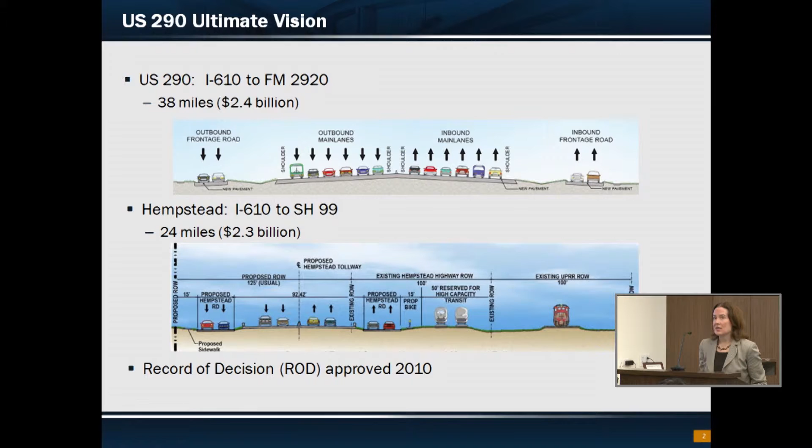From the costs shown on the presentation slide, you can see that the total is approximately $4.7 billion for the program. Neither agency had the funding or the resources to implement at that time, so they decided to pool the resources and work together. And what resulted in that was, in spring of 2012, a memorandum of understanding for an interim implementation on US 290, which consisted of a 2 to 3 lane reversible facility down the center, plus one additional general purpose lane from I-610 to State Highway 99. I should point out, as part of this MOU, projects on US 290 were expedited by up to 20 years ahead of their original implementation schedule.

In fall of 2012, public meetings were held on this proposed interim implementation on US 290. In 2013 and 2014, agency resources and responsibilities were reallocated between the two agencies, and as a result, the funding for US 290 was reduced. Therefore, a revised plan for US 290 had to be put in place. And what this plan consisted of was one additional general purpose lane in each direction from I-610 to State Highway 99. And I should mention that this is above the previously interim configuration, along with maintaining the one-lane reversible facility down the center. Public meetings on this concept were held in September of 2015.

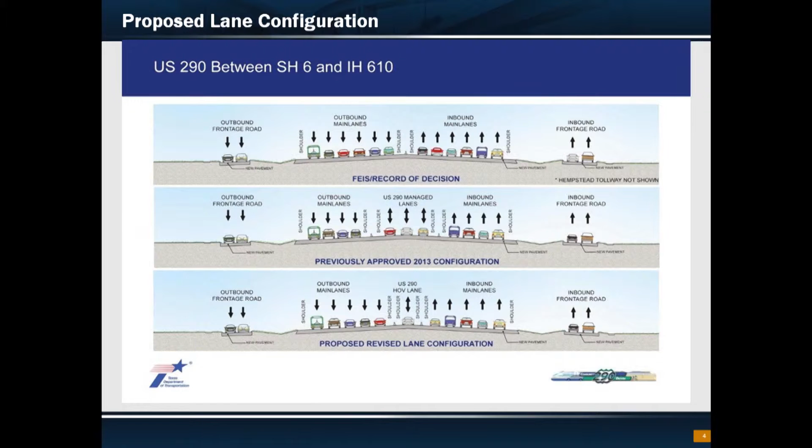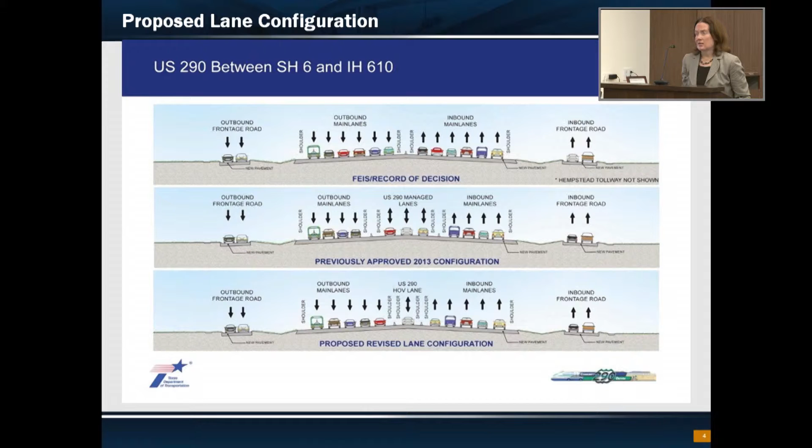Looking at specifically what this configuration involves, I want to start with the eastern portion of the corridor between State Highway 6 and I-610. On this graphic, the top shows the ultimate vision of the corridor. Like I mentioned, this has not changed. The second graphic shows what was previously approved, and the bottom section shows the proposed revised lane configuration. Again, the additional main lane capacity while maintaining the US 290 HOV down the middle. I should note that the HOV, as proposed, would have shoulders such that vehicles on the HOV lane could pass a stalled vehicle. This is different than how it operates today. What is operating today is in an interim condition during construction.

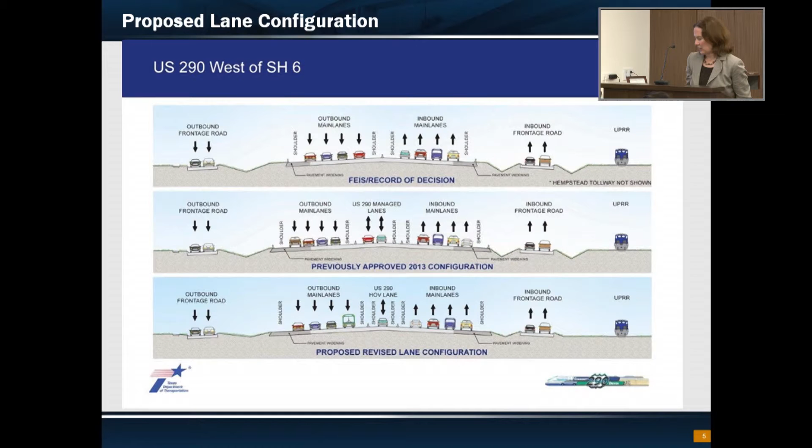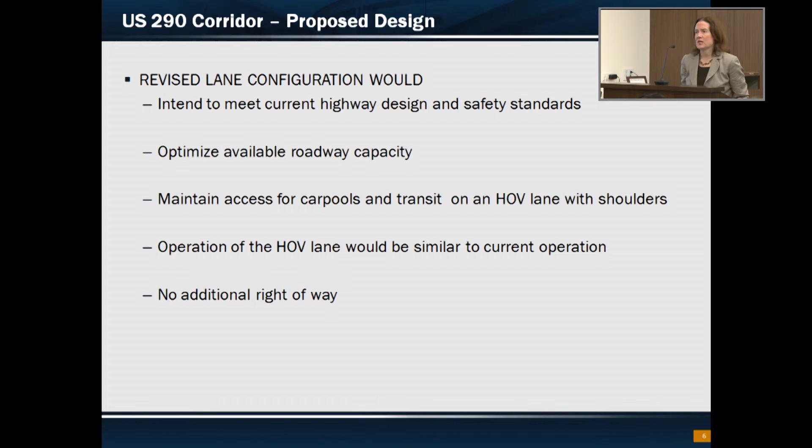Similarly, for the western portion of the US 290 program, specifically State Highway 6 to the Grand Parkway, the three sections are shown on the slide here. What we're looking to implement is the bottom section with additional main lane capacity and the one-lane reversible facility, again with shoulders to accommodate vehicles being able to pass a stalled vehicle on the HOV lane. So what the proposed design does is meet current design and safety standards. In addition, it maintains access for carpoolers and transit on the HOV lane, and the HOV lane operations would be similar to the way the HOV lane on 290 operates today. In addition, there's no additional right-of-way that is being proposed as part of the change in the interim implementation.

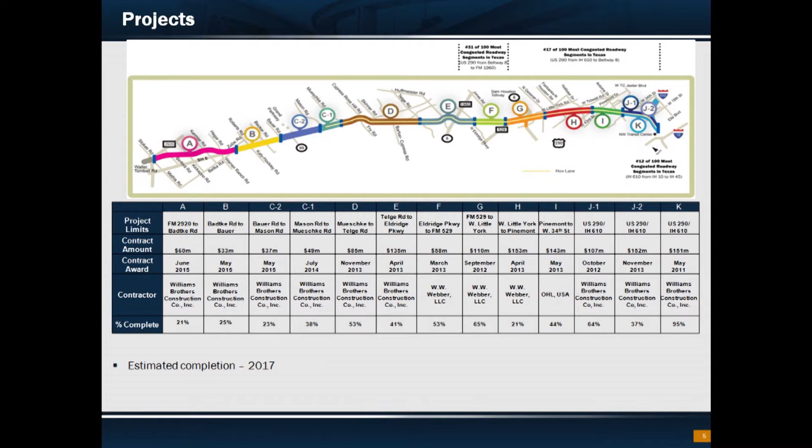This graphic here represents the status of the US 290 construction program. We have currently 13 projects under construction. Their construction completion ranges from approximately 20 to 95%. The proposed revised interim implementation does not impact the ongoing construction because we're using the existing right-of-way, the existing pavement in the corridor. What will happen is towards the end of each of these construction projects, the barrier placement and striping will be change ordered into the project. So the change in the interim implementation does not impact the ongoing construction on 290. I should also note the estimated completion of the US 290 program is late 2017.

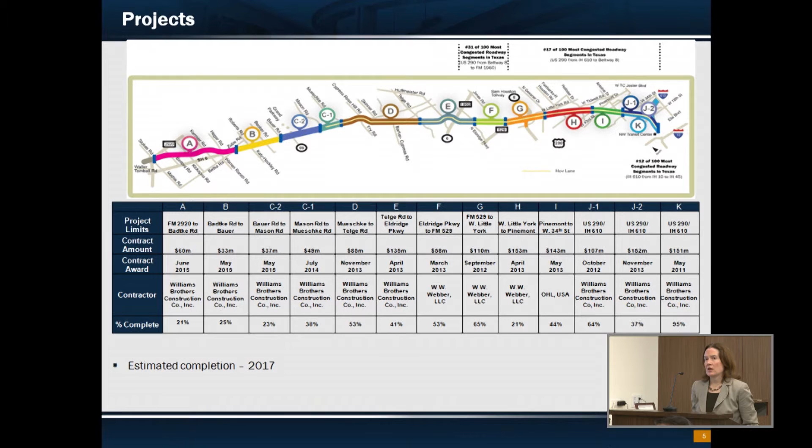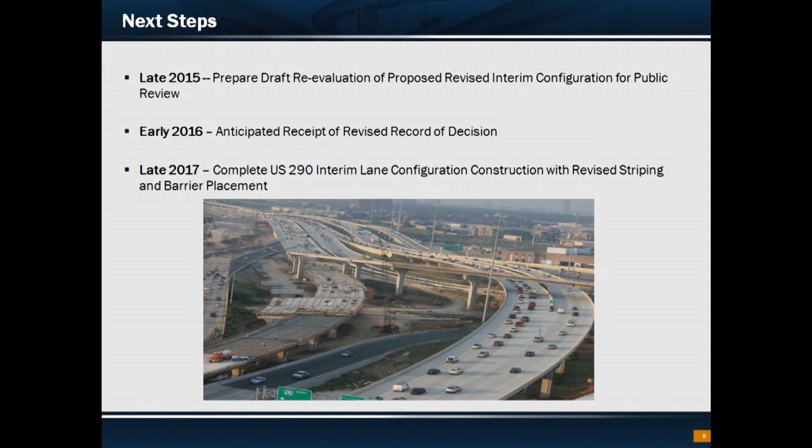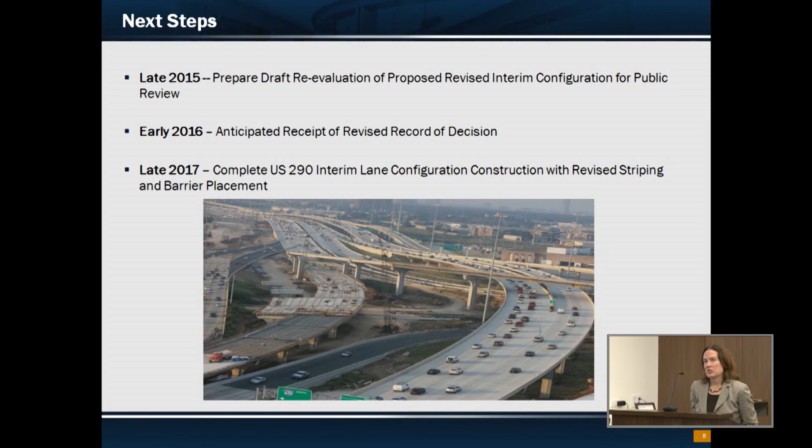So next steps in terms of the interim implementation. Currently, the environmental consultant is working on the draft reevaluation of the revised interim lane configuration, and this does include coordination with HGAC on the conformity. We anticipate having a revised record of decision in early 2016, and as I mentioned, construction being complete in late 2017 with revised striping and barrier placement. So with that, I'd like to open it up for any questions or comments.

Any questions for the presenter? If not, I believe you need a motion from us for acceptance of the revisions. Is that correct? That is correct, Chairman. Do I have a motion? So moved. Do I have a second? Second. Discussion? All in favor? Aye. Aye. Opposed? Thank you, Ms. Studdard. Thank you for your presentation. Thank you.